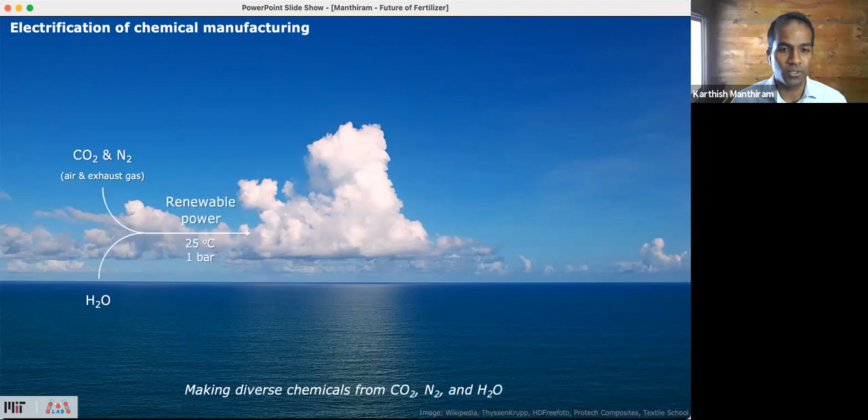So our vision for doing this is to develop an electrically powered process. To start with CO2 and nitrogen, which could come from air and from exhaust gas, and to combine that with water. And these feedstocks then can be combined using renewable power at 25 degrees centigrade and 1 bar in order to generate diverse chemicals and materials.

So we can take carbon out of CO2, take nitrogen from dinitrogen, hydrogens and oxygens from water, and combine these 4 elements, carbon, nitrogen, oxygen, and hydrogen, and stitch them together to make many of the chemicals and materials that we rely upon in our everyday lives. So we could generate fertilizers, make paint, make carbon fiber, and make fabrics. These are some of the early targets that we're approaching in our laboratory.

So this here shows how one might actually implement this paradigm. Imagine that you have a solar farm, which is generating large amounts of cheap renewable electricity. That renewable electricity could be fed, for instance, to a neighboring plant, which can take air from the atmosphere, take water from a neighboring source, and react those two to generate ammonia. So this is the basic reaction that we're showing at the top here. The only externality here is oxygen.

So rather than making CO2, which is what we get when we use methane as the hydrogen source, by using water as the hydrogen source, our only emission here is of oxygen, which of course is benign. We could hopefully do this at 25 degrees C and 1 bar and with renewable power. And that ammonia that we make could then be used to fertilize a neighboring field. So you can see here how this is a paradigm that enables the generation of this ammonia close to where it's needed.

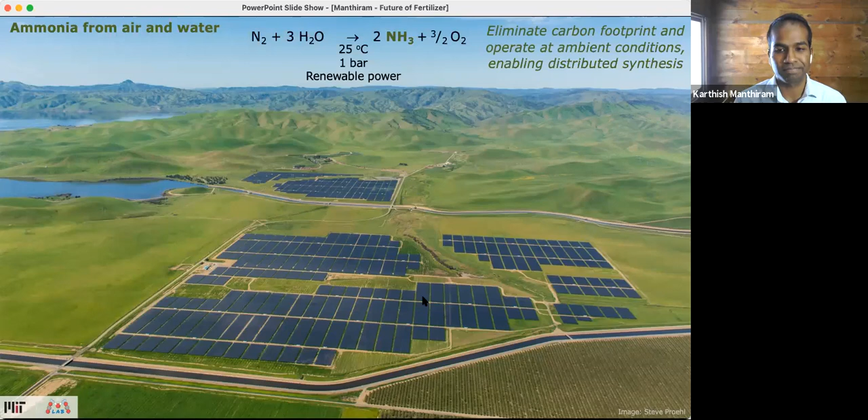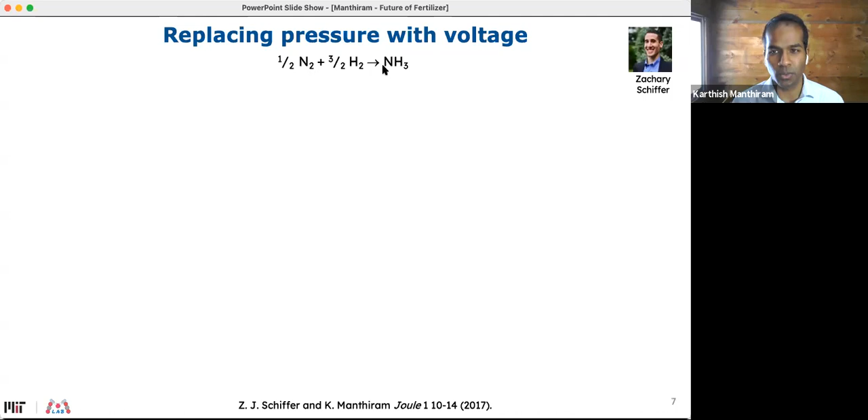So what we've put forth so far is that we want to replace pressure with voltage. And let's see what this means in the context of this specific reaction, this reaction of nitrogen plus hydrogen going to ammonia. So we can start with the thermochemical case. This is a color map that shows the conversion of this reaction. The conversion is defined as going from 0 to 1. If it's 0, it means we're entirely at reactants. And if it's 1, it means we've fully gone to product. So regions which are red are favorable thermodynamically, and those which are blue, we would try to stay away from.

So looking at this thermodynamic map here, we may perhaps want to start at close to room temperature and ambient pressure. And what we would find, of course, is that while the thermodynamics are favorable, the kinetics do not work out. These collisions do not lead to productive conversion of nitrogen and hydrogen to ammonia. So we're forced then to increase the temperature, going up to say about 500 degrees centigrade. And at this point, the nitrogen and hydrogen kinetically react, but thermodynamically, we can see on this plot the problem, which is that we have a near 0 conversion. So while this is kinetically useful, it is not practically viable due to thermodynamics.

So we can then pressurize this reactor, take it up, say, to 200 to 250 bar, and at this pressure, achieve a slightly lighter shade of blue, where we have about a 15% single pass conversion. And this is how we make all the world's ammonia today. It is remarkable to me in a way that this is how we feed the world, with a process that has a 15% single pass conversion. And really, it's a testament to engineering that we've been able to make this work as well as it does.

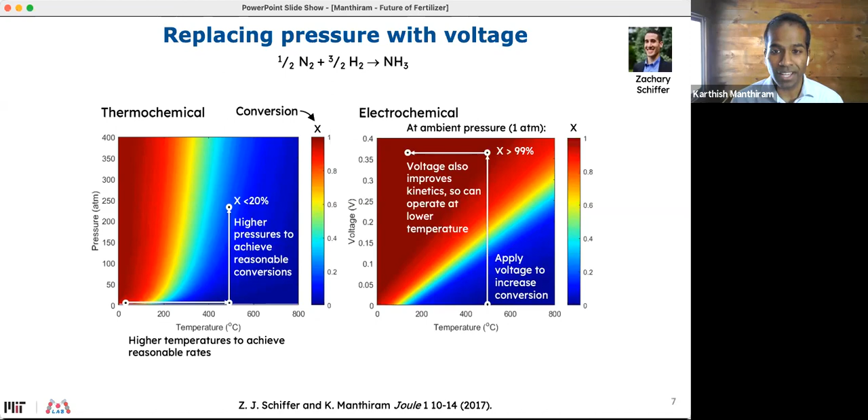Now, a second aspect which is important is that the voltage helps not just the thermodynamics, it also helps the kinetics. So in principle, we could operate at a lower temperature. And realizing this advantage is what our lab has been focused on, to use electricity and to find catalysts that can make this vision come true. So we've been working on a lithium mediated route for nitrogen fixation.

And this development of catalysts is important because the previous plot may have given you the impression that this should already be possible. But the reason why it's not, and the reason why it's not already commercially deployed, is that we don't yet have catalysts that can facilitate this electrically driven transformation of dinitrogen gas into ammonia. The hardest part of that is breaking the nitrogen triple bond. And here we're using lithium metal to do that difficult step.

The lithium metal reacts with N2 in order to generate lithium nitride. This is a reaction which happens at ambient conditions. So it's something that doesn't really require much effort on our part since the lithium is doing the heavy lifting. This lithium nitride, which contains separated nitrogen atoms within it, is something that we can then protolyze, so we can break this apart, generating ammonia and regenerating lithium ions.

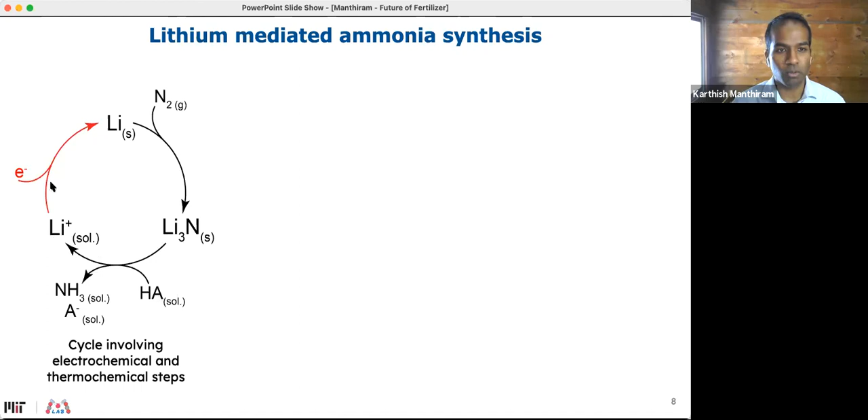Here, one starts with a molten lithium chloride, lithium hydroxide bath, plates out lithium ions to make lithium metal, scrapes that lithium metal off, making a lithium foil, cuts this up, puts it in a beaker, adds in nitrogen gas to make lithium nitride, then drips in water to make lithium hydroxide, along with ammonia, and then boils the ammonia off, leaving lithium hydroxide behind, and then puts that lithium hydroxide back into this first vat in order to plate the lithium back out.

So while this acts as a proof of concept in the literature, we know, of course, that this is not going to be a viable method of making the ammonia that the world needs. This is a multi-step process conducted in batch, and with this sort of solids handling, that would make it very difficult to practically implement.

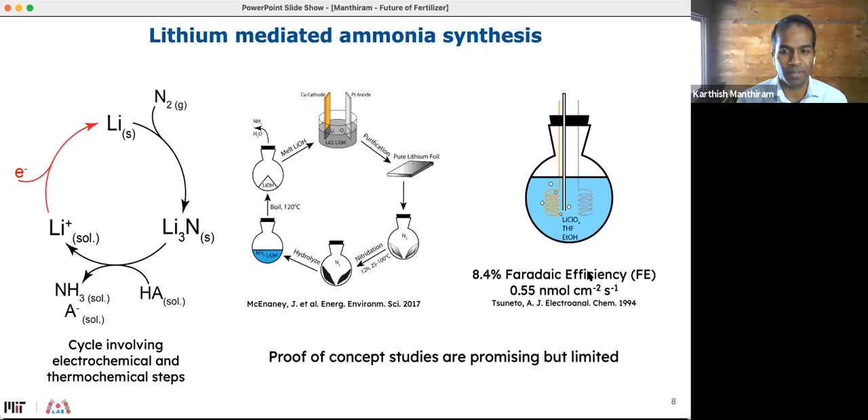And the rates were also relatively low, so 0.55 nanomoles per centimeter squared per second. So these are a relatively humble starting point in terms of an electron-based selectivity and the rate with which ammonia was being made. So we set out then to try to achieve higher rates and efficiencies for a semi-batch nitrogen reduction process. And we wanted to do this by elucidating the mechanism of this reaction, which before had not been uncovered.

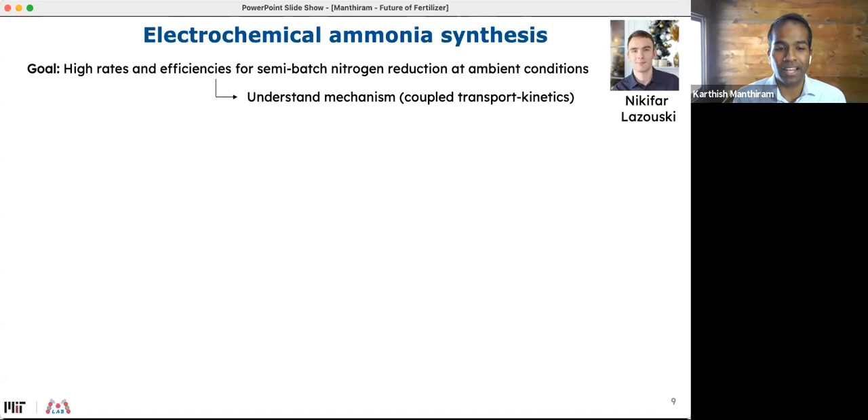At the surface of the copper electrode, we're plating lithium ions to make lithium metal. We're transporting dinitrogen to the surface, which reacts to make lithium nitride. That lithium nitride then reacts with a proton donor to make ammonia, and that ammonia is then evolved. And all these microscopic steps are occurring at the same time at the surface of the electrode.

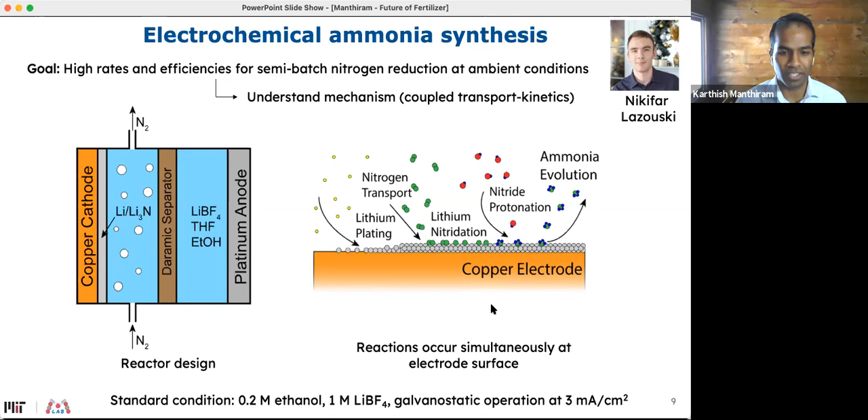And so we've been able to separate these two and learn to describe the kinetics that occur in this region through a vast array of kinetic experiments that we've done coupled with spectroscopy. So I won't show you all the other data here, but I do want to show the outcome of that, which is the ability to write a reaction network.

We can see how one starts with lithium ions. Those lithium ions then are plated to make lithium metal. That lithium metal can then go to one of two fates. One is reacting with dinitrogen to make lithium nitride, which then eventually leads to ammonia. Or this lithium metal can be intercepted by the proton donor directly, making hydrogen. So this then is our undesired reaction. We want to avoid making hydrogen from this lithium and instead promote the generation of ammonia.

So our lab developed this understanding of this reaction network by writing very simple rate expressions of the sort that many of you probably learned in 1037, and taking these simple rate expressions and combining them along with boundary layer theory. So using our knowledge from 10302, which is the course that I actually teach, so it's something that's near and dear to my heart. But putting together then this kinetic description of the rate along with a transport correction, which we were the first to recognize, which together then allow us to quantitatively describe the Faradaic efficiency, or this electron-based selectivity for this reaction.

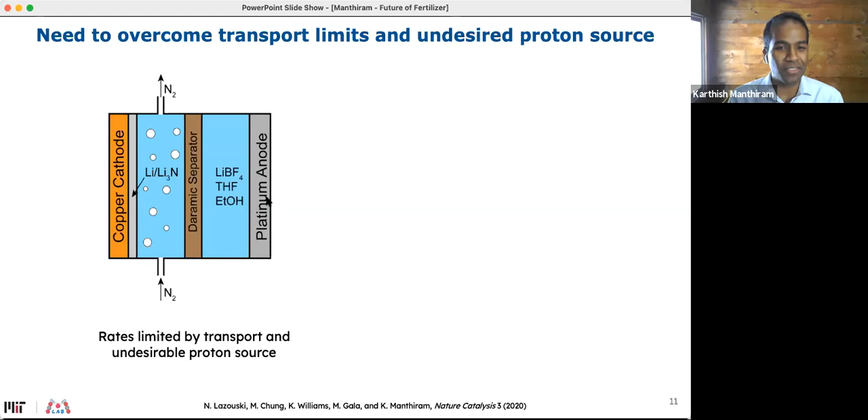So we have two problems then. So the first, which I just described a moment ago, is this issue of transporting nitrogen from these bubbles to the surface of the electrode where it's needed. So we have an issue of transport. And the second is that we have an undesirable proton source in this reaction. We're actually oxidizing THF and ethanol at the platinum anode. And while this allows us to study nitrogen fixation at the cathode, I think we can all agree that chewing up THF and ethanol to make ammonia is something that's not going to be techno-economically viable.

So our group sketched this out on a whiteboard about 1.5 years ago, just dreaming of how we would want to fix this reaction to overcome these two problems. The first was that we needed some effective way of contacting this gaseous nitrogen with the liquid phase electrolyte and our solid phase here, which brings in the electrons. So we needed some new contacting scheme. And we also needed to introduce hydrogen at the anode such that our overall reaction would be nitrogen plus hydrogen goes to ammonia, instead of nitrogen plus THF and ethanol going to ammonia plus undesired oxidation products of THF and ethanol. So this cartoon sketch we thought could help overcome these challenges.

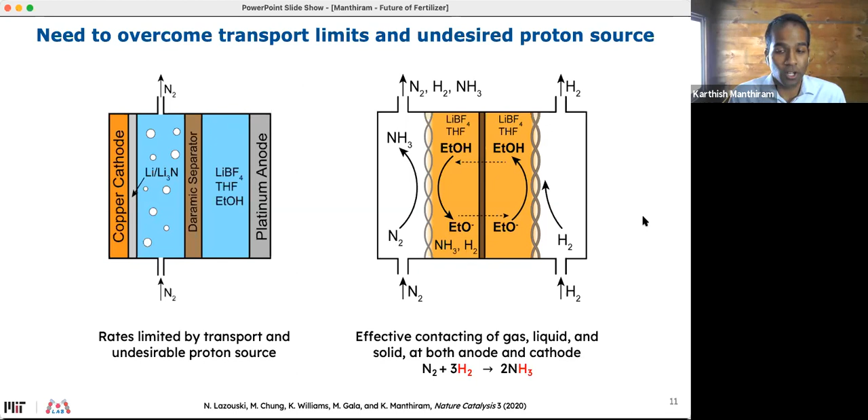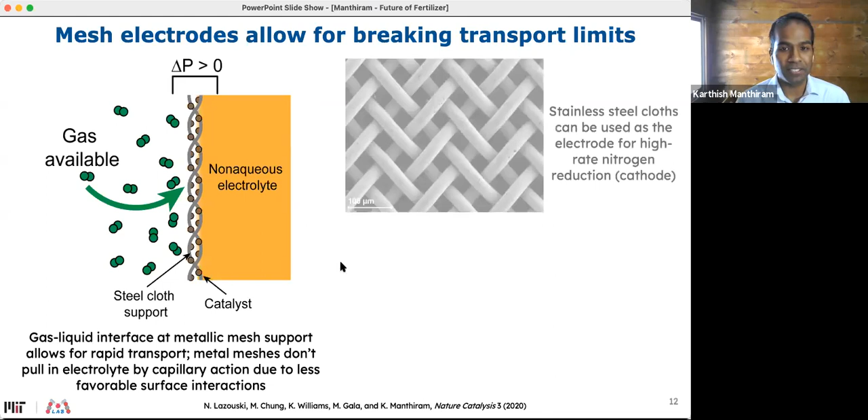So we developed this new technology in our lab, which involves a metal mesh electrode. This metal mesh electrode allows us to contact the nitrogen gas with the liquid phase electrolyte and the solid electrode. And this system then involves this sort of architecture, which you can zoom in on and look at in a scanning electron microscope. The stainless steel cloth we can directly employ at the cathode of the reactor.

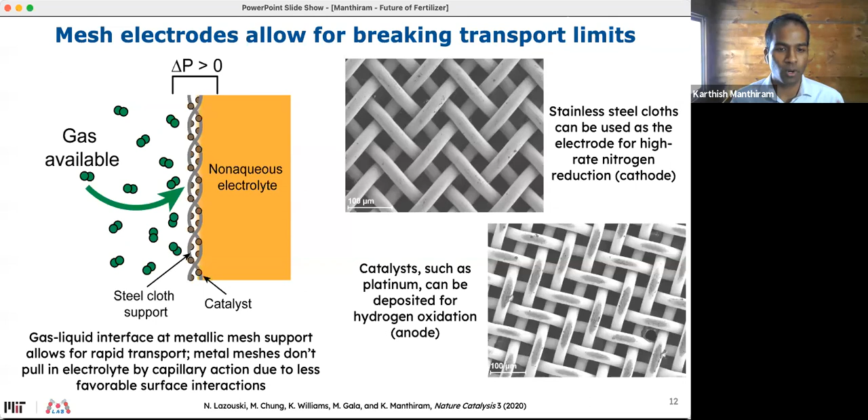And we can also deposit catalysts on it like platinum, which can enhance the rates of hydrogen oxidation at the anode. So this same metal mesh can be used both at the cathode and the anode of this reactor. So what we find in our experiments is a dramatic enhancement of the rates and Faradaic efficiencies. So I show here rates of about 30 nanomoles per centimeter squared per second. So this is breaking the previous transport limit that I described of 10 nanomoles per centimeter squared per second. So we're already seeing rates that are above what we could achieve in a flooded system.

And beyond that, we see that the Faradaic efficiency is also much higher. We can reach a Faradaic efficiency of 40 to 50%. So we're well beyond what was the prior record in the field of 8.4% before we started, or what I showed earlier in our own lab of around 20%. So we're putting about half our electrons now towards the desired process.

We can also couple this to water splitting. So of course, this isn't just about taking nitrogen and hydrogen and reacting those to make ammonia. We want that hydrogen to come from water splitting so that it is from a sustainable source. So here we couple this to an electrochemical water splitter. And we can see this on the right-hand side. This is the actual prototype that we built in our lab, which then allows us to realize this overall reaction of water plus nitrogen going to ammonia plus oxygen.

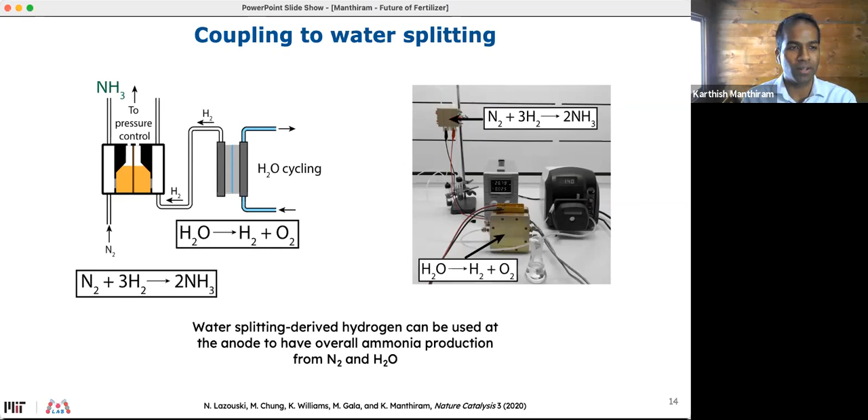We can see how this stacks up relative to what's been shown in the broader literature. So all these data points shown down here in green and in red and in blue and in purple are all the best performing data points from the literature, which are plotted based on their Faradaic efficiency on the x-axis and the production rate on the y-axis. And you'll see here that the system that we've developed with these two black points have much higher rates, 1 to 2 orders of magnitude greater.

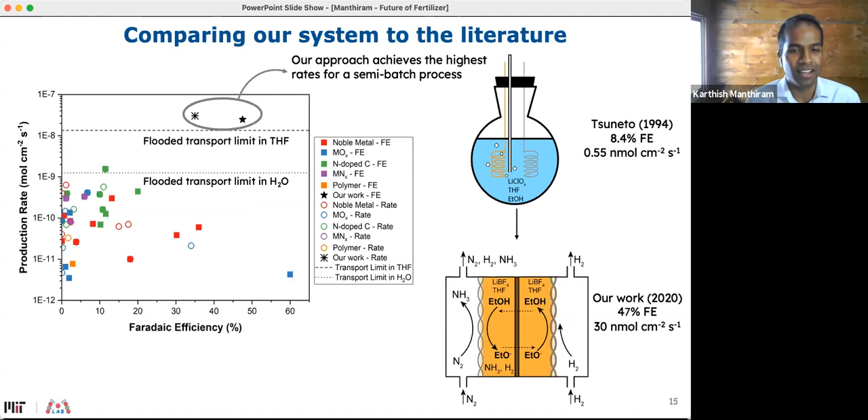Certainly there's room to improve in the Faradaic efficiency, but the rates are essential for capital equipment depreciation. So this is a system which right now holds the record for rates of ammonia synthesis at ambient conditions, but we're of course looking to continue to improve upon this.

So the big problem in this system, which I haven't talked about yet, is that while we've solved in part the problem of rates and have improved the Faradaic efficiencies, we're losing a lot of energy in this system. So at present, for all the energy that we put in, only about 3% of it goes towards our desired product of ammonia. And what this means is that we need to do energy accounting to figure out where all the other energy losses are. And it turns out that most of them are from resistive losses in the electrolyte. We're wasting a lot of energy trying to move ions around in the electrolyte.

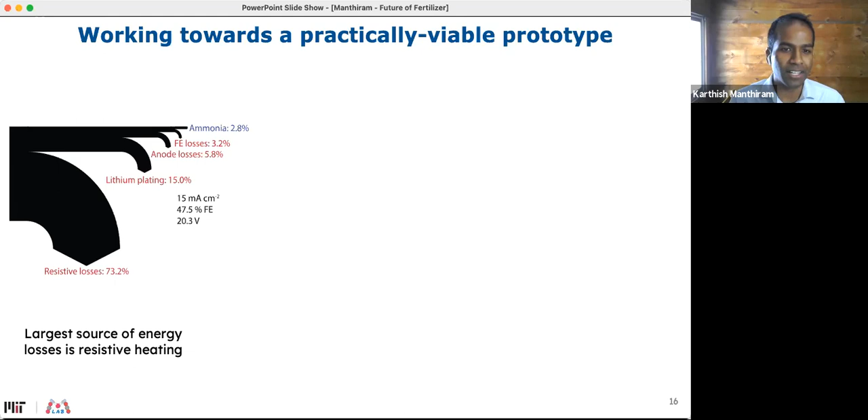So we're initiating efforts in our lab, and this will likely be a multi-year effort to actually solve this problem, to develop new electrolytes. So first, we want to be able to create an architecture which is thinner, simply by reducing the distance between the electrodes. That can reduce the resistive losses. So this is one important effort that we're undertaking in our lab.

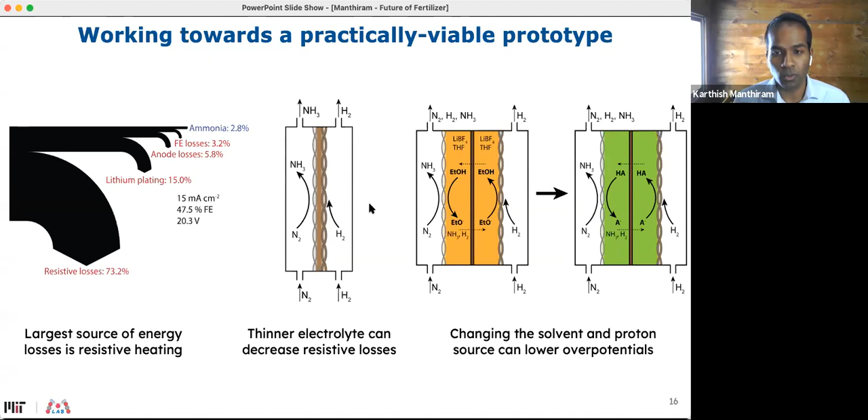And a second, which we'd like to also work on, is to make more conductive electrolytes. By switching out the solvent and the proton source, we can reduce those resistive losses and head towards making a system which hopefully has an order of magnitude higher energy efficiency. And we think at that point, this could actually be a system that is heading towards practical viability.

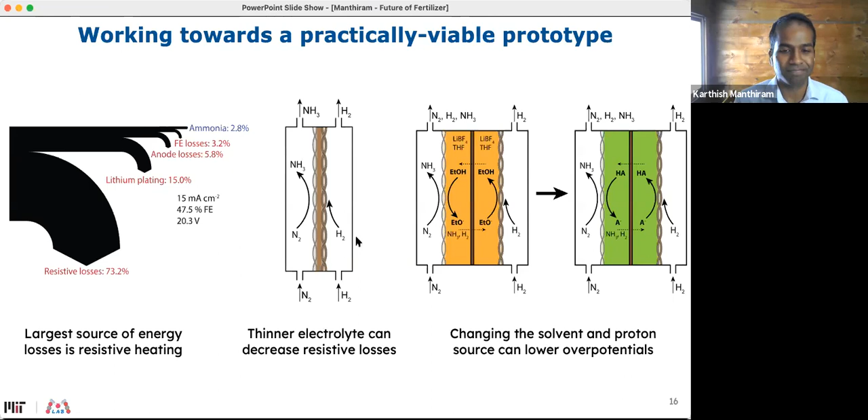So we'll wrap up here in just a moment. Just 2 quick points that I want to make at the very end here. The first about why now, and the second about what are the other benefits of this sort of system. I think it's fair to ask why an electrically powered ammonia synthesis prototype has not already emerged. Why isn't the world already making its ammonia using electricity if this is so promising in the way that I described? And a lot of this is because the price of electricity has fallen beyond what I think anyone could have imagined for renewable sources.

Solar panels were $76 per watt in 1977. And just a few years ago, we hit a quarter, 25 cents per watt, and we're even lower than that now. We're getting to the point where the energy price for the electricity that goes into these chemical syntheses may no longer be the dominant factor.

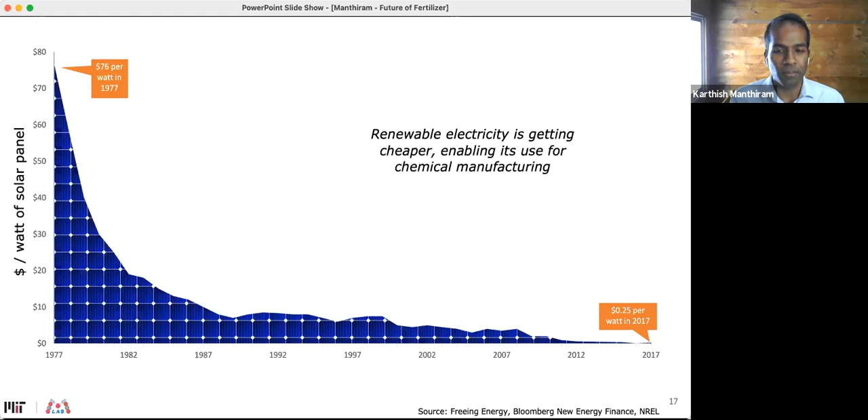And that's a dramatic reversal from what techno-economic calculations used to look like just a few years ago. So this is one of the biggest drivers which we want to leverage in our own work.

One more thing that I'll mention here is looking at the price of fertilizers globally. And I mentioned earlier that distributed manufacturing of fertilizers is important. And I want to give a little bit of data to support that. So what we have here is dollars per ton of urea. And urea is an ammonia-based fertilizer. On the far right-hand side, we have the international average price, which is about $200 per ton.

And you can compare that to the price of urea in several countries in sub-Saharan Africa, in Burkina Faso, Cote d'Ivoire, Ghana, Mali, Nigeria, and Senegal. And you'll see that the price of urea is anywhere from 2 to 3 times the international average. The reason for this is because of poor infrastructure, which leads to high distribution costs. Those fertilizers cost about the same up until the point that they're brought to port, but it's that distribution from port to within these countries that adds a lot of cost because the infrastructure is not there.

And so this is part of why we're really excited about developing electrified ammonia synthesis. These are technologies which are modular since they involve lower temperatures and lower pressures, and that in turn could enable the synthesis of the ammonia close to where it's needed, overcoming these distribution challenges that have historically existed.

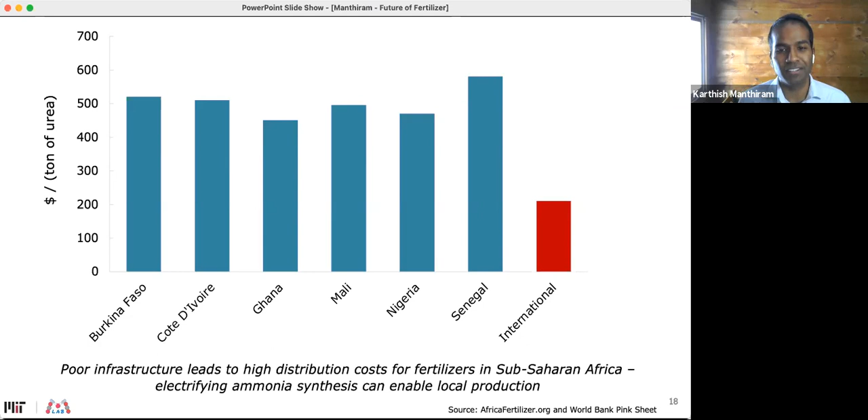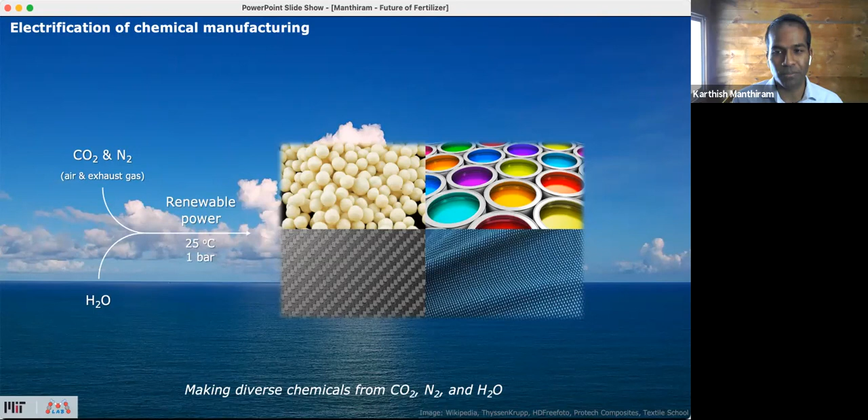So we come back now to what I shared much earlier in this presentation, this vision of being able to take CO2, nitrogen, and water to make all the chemicals and materials that we rely upon. We've talked about just ammonia here, which is an important part of this problem, but again, just one piece of that problem. So we're working in our lab on several other parts of this as well, learning how to convert CO2, which would otherwise be emitted, into a useful feedstock. So here, converting that CO2 into CO, and then making that into something that can then be further implemented in downstream reactions.

And we're also working on epoxidation reactions, so ways in which water can be used as a sustainable source of oxygen atoms for chemical synthesis. This is a scheme which looks a lot like a water electrolyzer, where we're splitting water to make hydrogens and oxygens. But instead of recombining those oxygens to make O2 and just giving it up to the universe as something that has no value, why not use those oxygen atoms for useful chemical synthesis?

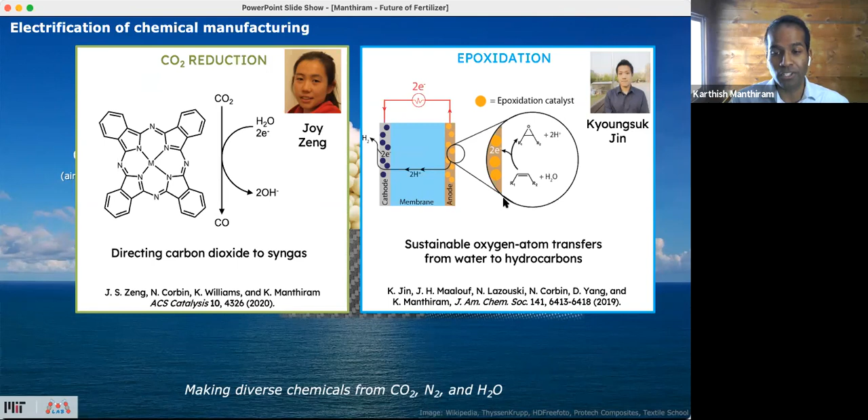And here we're showing how those oxygens can be used to epoxidize olefins. And those epoxides are used in diverse applications, all the way from polymers to antifreeze. So there's a lot of motivation for being able to decarbonize epoxide production, which today has the 5th largest CO2 footprint of any chemical that we produce. So 2 more examples of where we want to take this platform to impact diverse parts of chemical manufacturing.